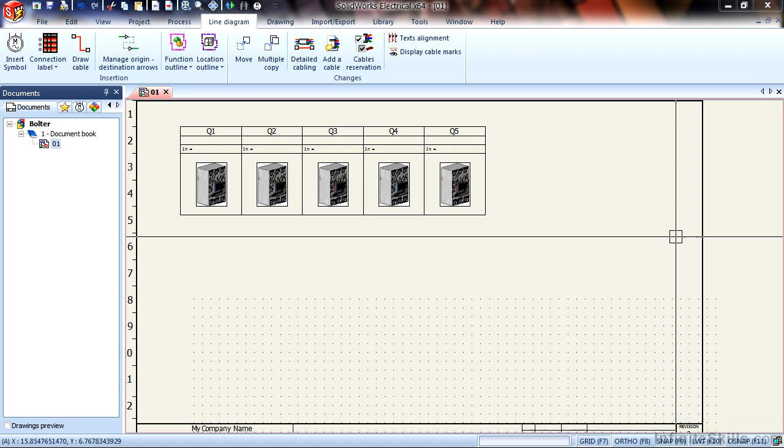To create a logical list of locations that your project can use, I recommend creating a project structure and location structure early on in your design.

In this case, I have a projects command manager here at the top of my screen, and I have access to a locations menu. In here, you will notice the locations manager. The locations manager will show the name of the project, your top level locations, and any sub-locations.

Perhaps in this case, we want to show a location for the main system as well as the main electrical closet. We may also have other sub-locations that are for the control panels that the operator of the machine will use. Let's go ahead and create a new location.

A top-level location can be created by right-mouse clicking on the bolter and choosing New Location. Here, I can then accept a mark number. It's incrementing automatically to L2. And here I can give it an English description for that location. I'm going to call this the operator controls. I will choose OK and see that it belongs to the top level bolter.

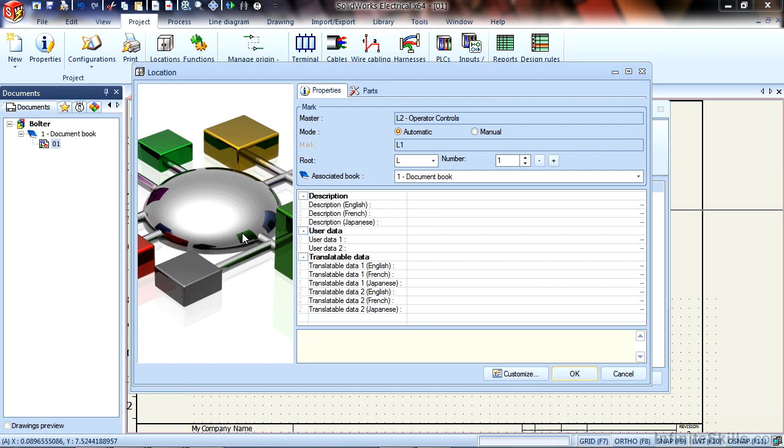If I want to create a sub-location, I can right-click on the location I want it to be part of and create a new location. I can call this the faceplate for that operator control box, and you can see that it lives underneath that now.

Locations can also be managed in the component browser tree. As you can see, I now have those locations, and I can also create new locations in the similar way.

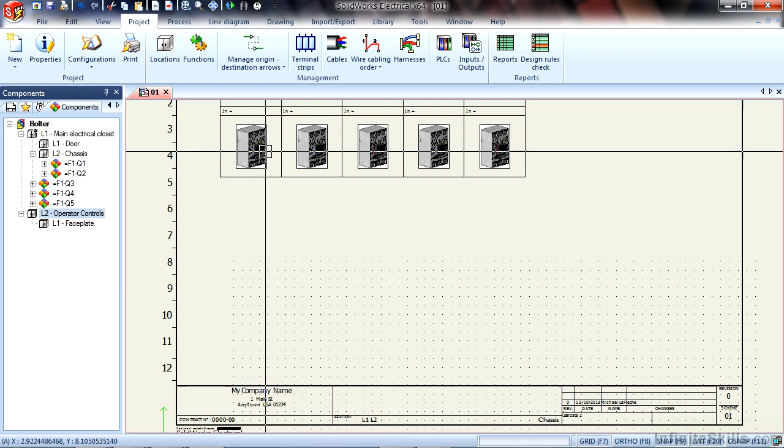Let's go ahead and create some other symbols. I need a terminal strip, and I also want to create some operator control type objects. In this case, I will go to my line diagram menu and insert a symbol, and I will browse to the terminal strip. I'm going to just turn off the automatic mark setting while I'm here.

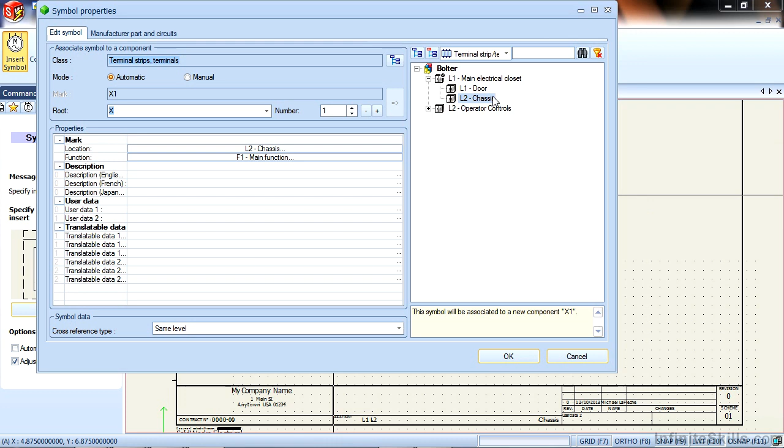So here I'm going to choose a terminal strip, and I'll pick that description of it, and I'll place that terminal strip right here. And of course I want that to default to the chassis of the terminal strip in the box.

These symbols can be modified, so I can actually drag these rectangular grips around, and it will actually expand. It might actually be useful to show a terminal strip looking like a strip here on the screen like so. Now let's go ahead and choose the control panel faceplate object.

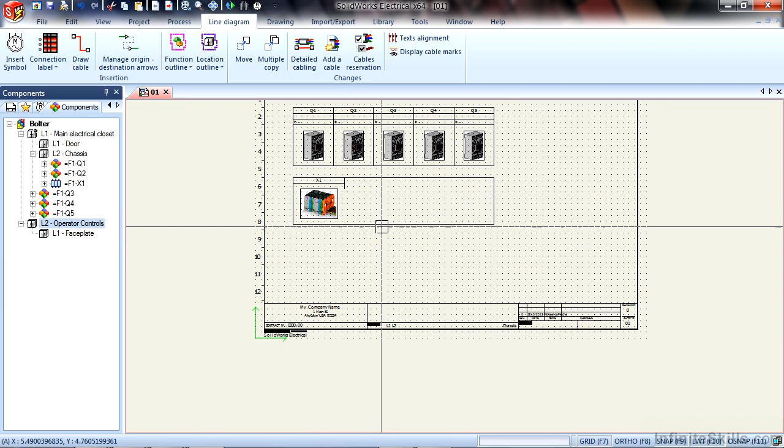I'm going to choose the insert symbol again and browse for another device. I want a button and a switch. Perhaps I want an emergency stop button.

And I will place that down here at the bottom of my screen, and I'm going to set that to a location for the faceplate of the operator controls.

A nice way of graphically displaying the locations to the user reading this diagram is to use a location outline. Location outlines can be accessed from the line diagram menu. Here you'll notice I can create a rectangular outline or an outline with a polyline.

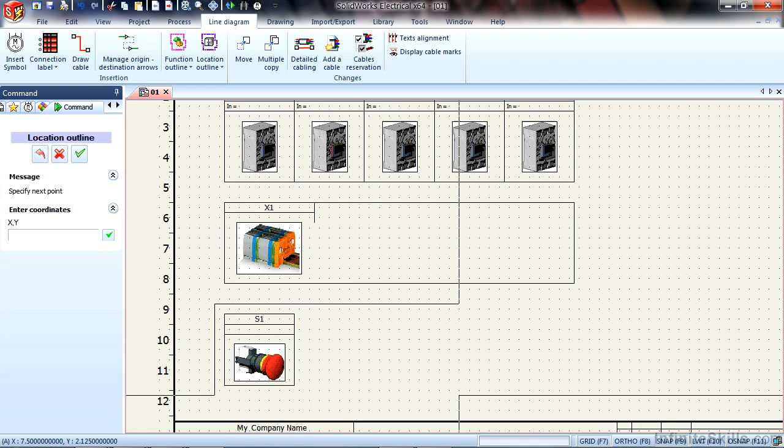And I can also set a default location label that would appear for describing that location. In this case, I'm going to choose the default label, so I'll leave that unchecked. I can draw a box around any objects that I want to place in that location, and then it will present to me the actual location selector.

In this case, I will choose the faceplate. And if there's any object in here that is not part of that location, we can change it right at that point in time. So there's the default label called faceplate. So this really makes it clear as to what's happening.

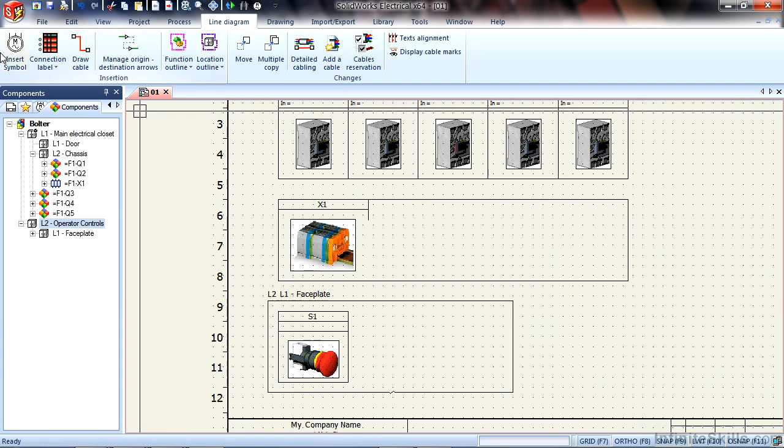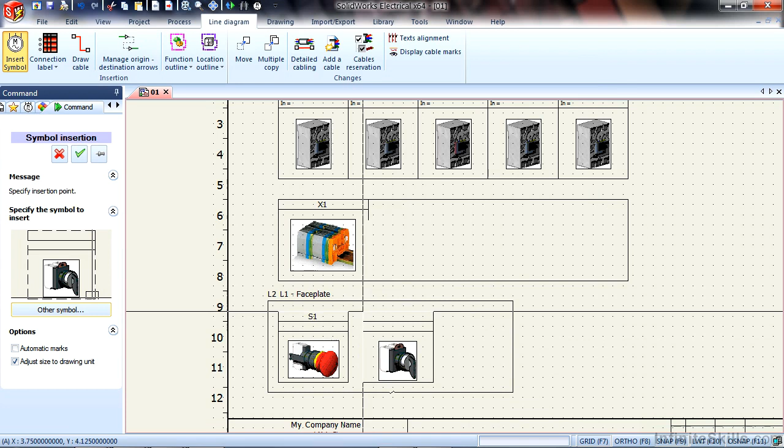So if we drop in another symbol, in this case, I'll choose another type of button or switch. I'll choose the switch symbol and drop it in here. It will automatically locate itself into the faceplate.